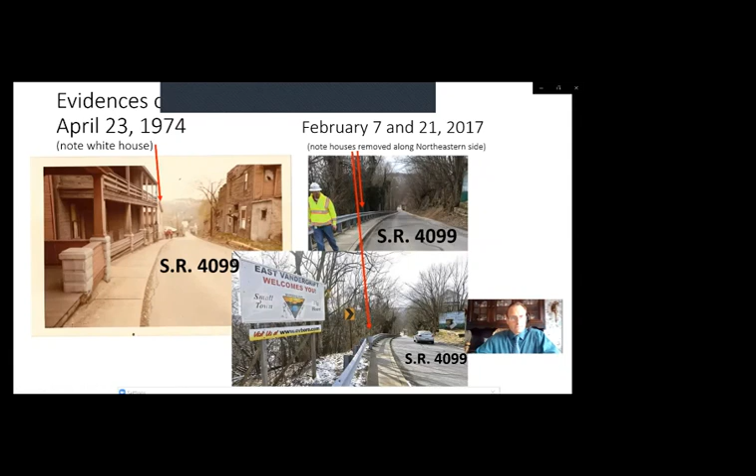Note this white house, because we'll be talking about it later in a couple of slides. Here's that white house. Frank Jones was the district geotechnical engineer at the time. He had the opportunity to go and visit with the people that owned the house and write a letter afterward explaining that it's not PennDOT's fault, it's the slopes around the road that are causing the problem.

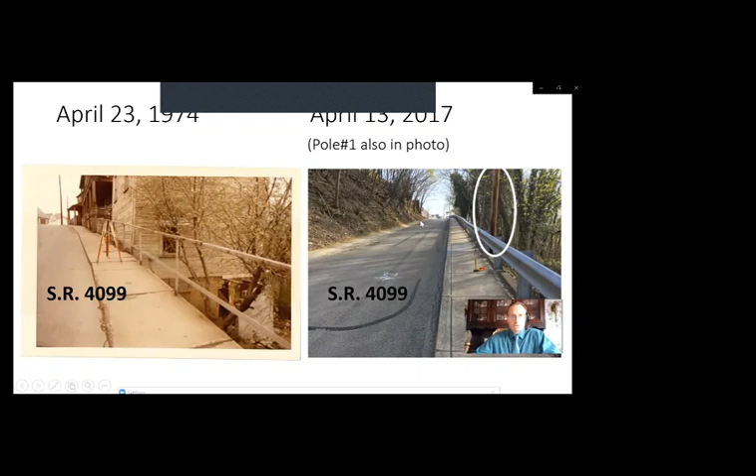Here's a picture from the outside of the white house, and the utility pole a little bit down further from where the white house would have been on the slope. This pole, when they put the sidewalk in, was actually formed into the sidewalk when they built it. Pole number one - as you can see, the slope has moved about 1.5 feet from when they put the sidewalk in. The pole has moved, and of course the pole moves with the slope.

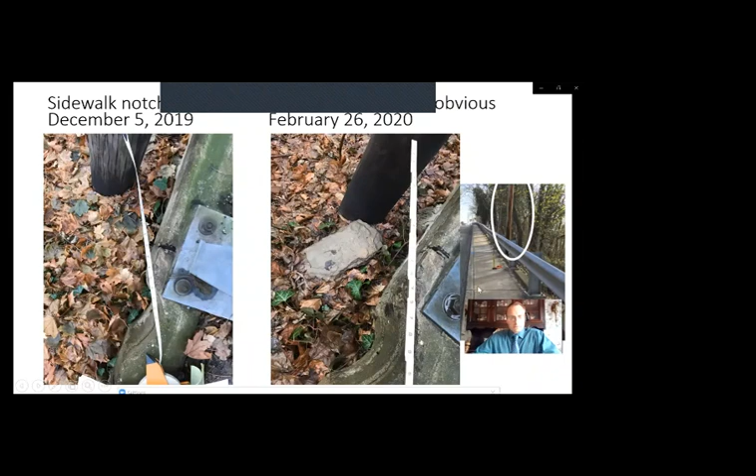There are 3 structures that were removed in the 14 years between December 2005 and 2019. They were all on the right-hand side, circled and pictured here. You can see there are GH holes painted on the roadway - those are grout holes, and we grouted under the roadway at that time because there were 5 to 8 foot voids discovered just underneath the brick of the roadway structure throughout this area in the northbound lane. So we grouted them up in 2005.

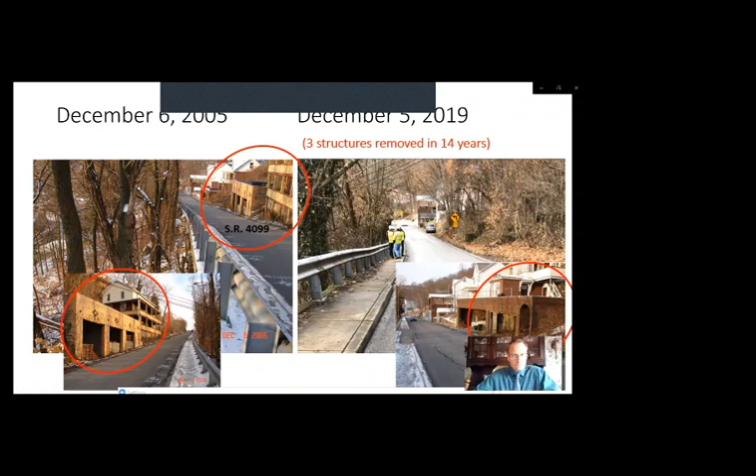This wall was bowing around the same time we put the inclinometer in, inclinometer F9. And in March, just before we determined this was an emergency, or around the same time, this wall collapsed.

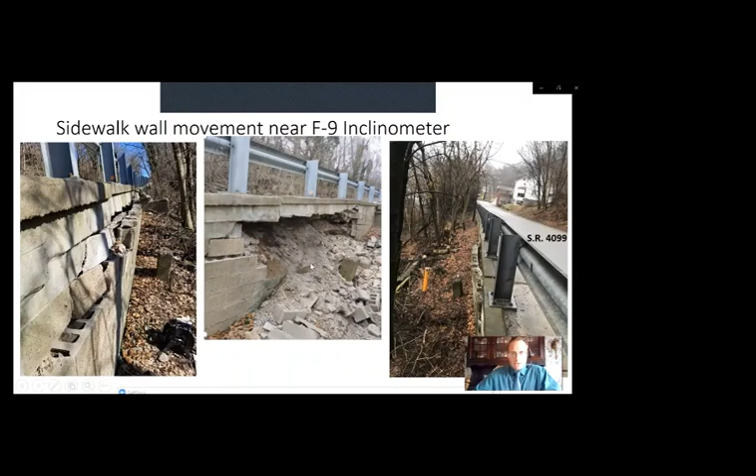A little bit more history here: in June 2017 we did a repair. We went down 8 feet, about 2 feet wide, like a bucket width, as far as we could go in the area that was having trouble where we saw sinkholes. We excavated it out and replaced it. Some areas, like in the foreground of this picture, had concrete that was already there, so we didn't remove it - it was hard to excavate that area, so we left it in place, probably from previous repairs they've done.

Similar to what we just did, that was only about a 40 foot long repair that we did there.

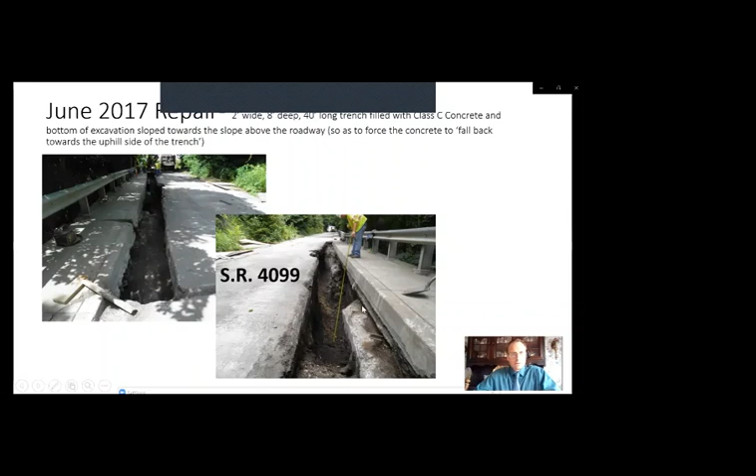Here's a series of photos from both Google Earth and Penn Pilot, historical photos showing the history of the disappearing structures along this stretch of roadway.

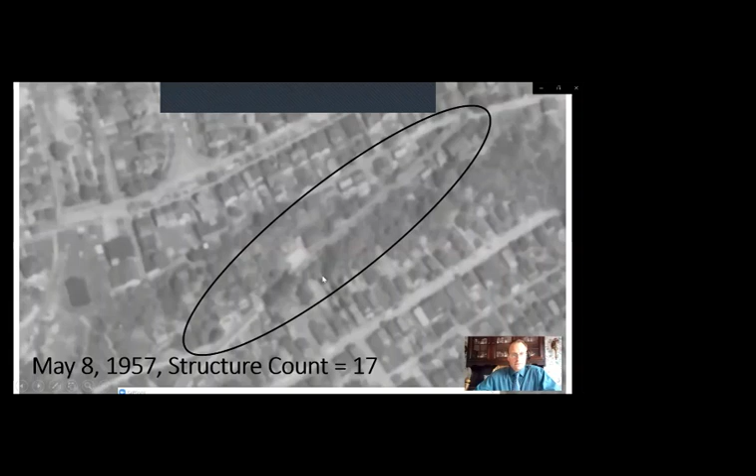Way back in 1957, I counted 17 structures. I think I got them all, I tried to count them all here. You can see both sides of the road had structures, and some of those we had pictures of early on in the presentation.

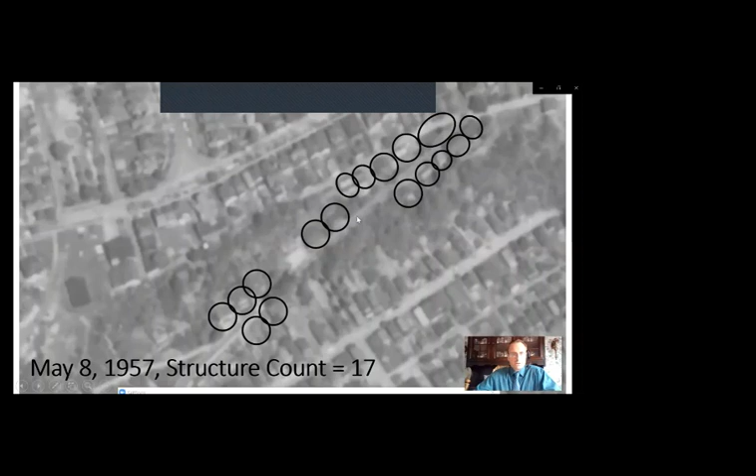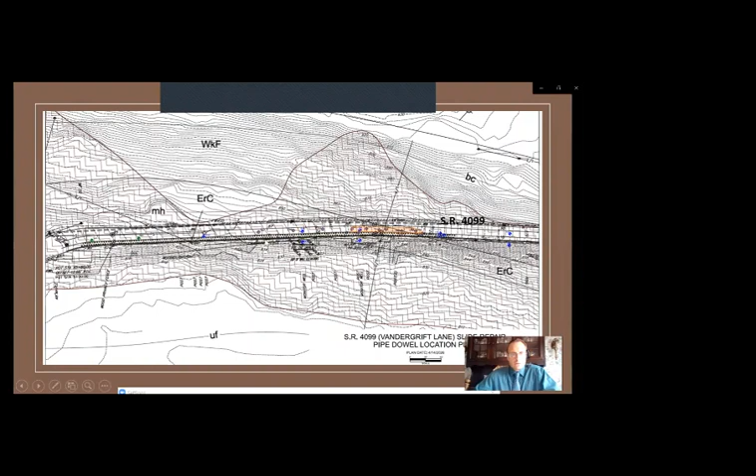Here they are, a little close-up shot. You can see that line comes right through at the edge of that porch, right near that front yard. And you'll see later we saw cracking just right there too while they were doing this construction.

These yellow dots represent the pipe dowels that they're installing for the slide repair. This just shows you about where the inclinometers are with relationship to everything.

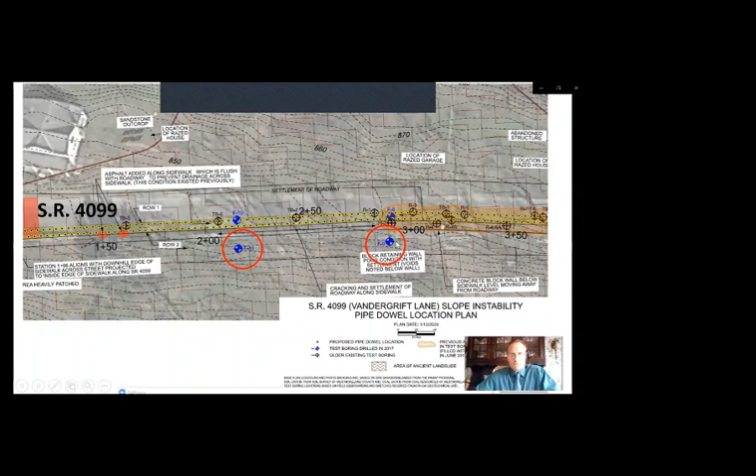So F9 is further away, F11 is closest to the house. And here's a picture of them in the field, off just over the slope here.

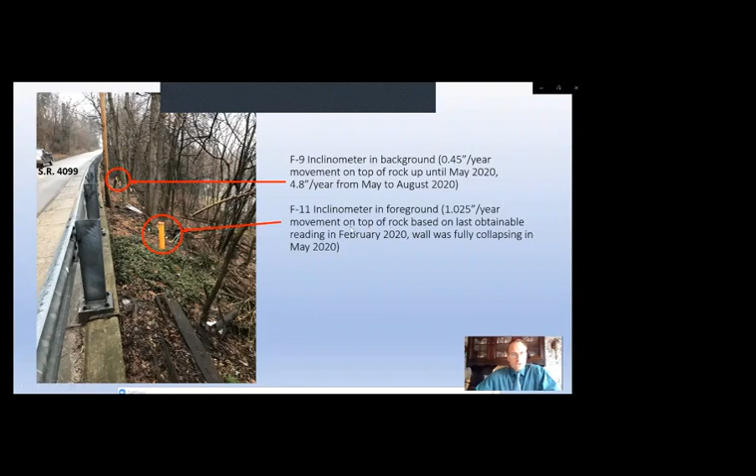F9 definitely showed an increase in movement, 10 times the increase in movement during construction than it did previous to construction. F11 was unreadable as of February 2020 because it had so much movement. I guess it pinched off or pulled apart. We couldn't read it anymore.

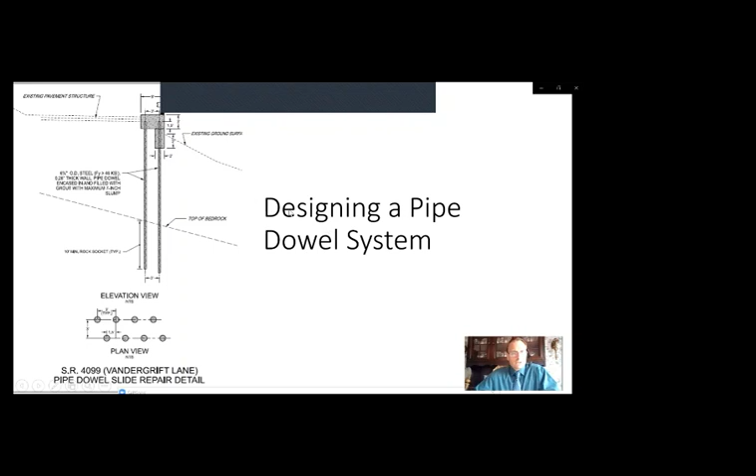Here's the conceptual design we're putting in for the repair: 2 rows of pipe dowels. You can see they're staggered, which activates soil arching to help stabilize the landslide. We're going to tie them together with concrete at the top, and we're going to detail basically what we did to come up with the design for the pipe dowel system.

So we drilled borings, and in the borings we put these inclinometers, and we got to see where the sliding was occurring. In this case, in F9, it was occurring in the weathered bedrock zone.

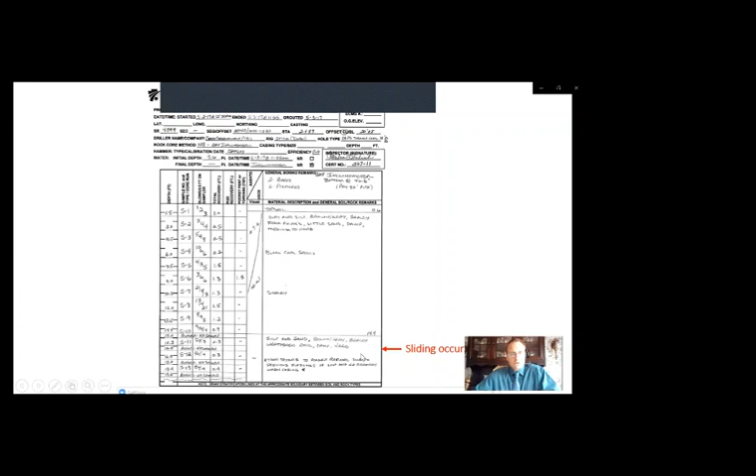Here's the readings. The axis AA is down over the slope direction, BB is with the traffic direction. You can tell that the movement before construction was pretty consistent, approximately 0.5 inches per year if you compute it out. And then once construction got going, it increased 10 times.

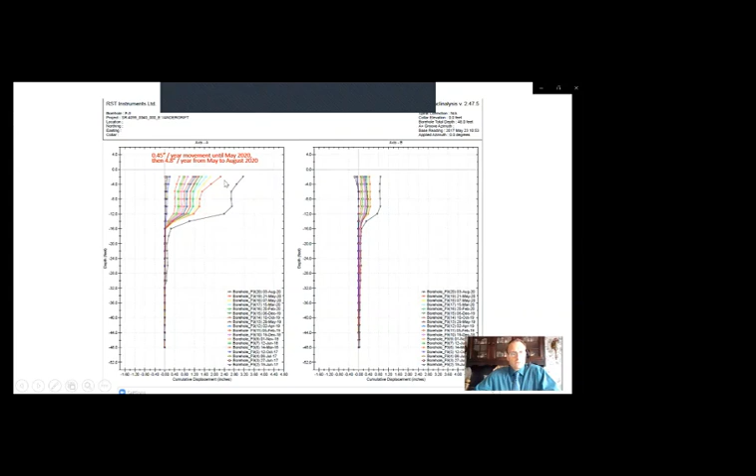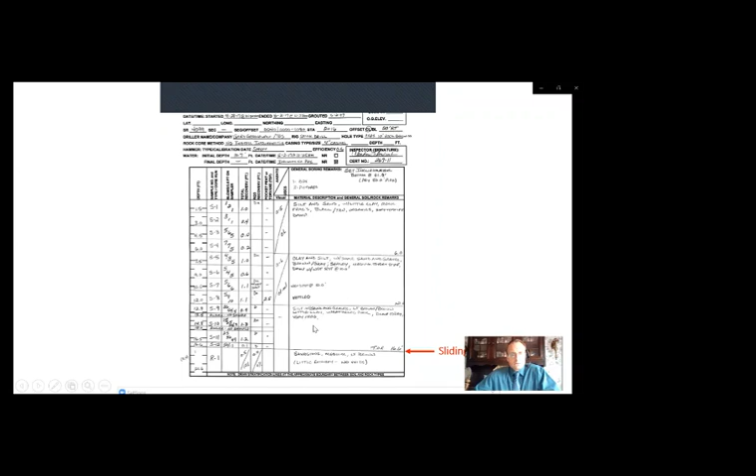F11 shows sliding right on bedrock beneath the weathered rock zone. It also shows the definite movement area. There's consistent movement here.

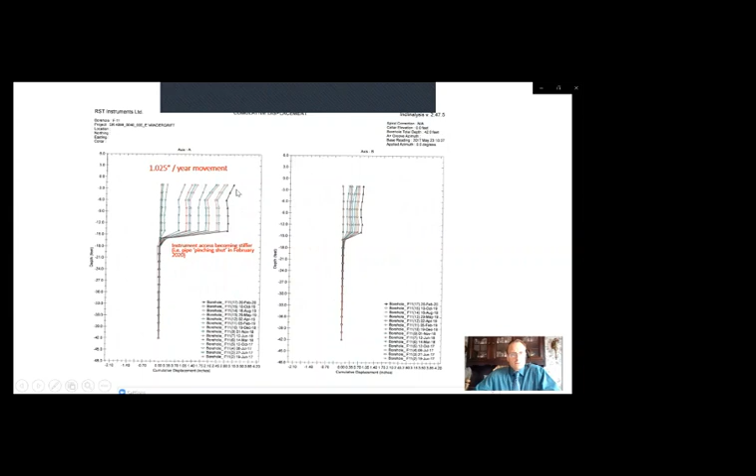We did some soil testing on those F series of borings too, and got laboratory test results back for those. We used as much as we could in our analysis.

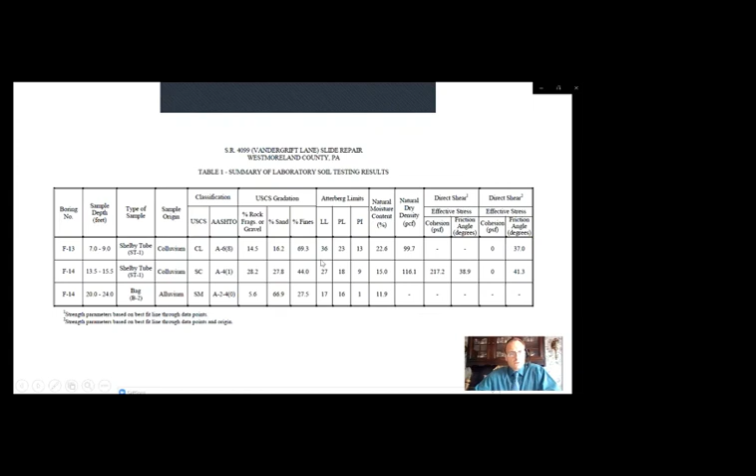We did back analysis also to help figure out our soil parameters and fit the failure surface right through where we saw the movement in the inclinometers. We adjusted the friction angles to make sure we got a factor of safety of 1, which means it's failing.

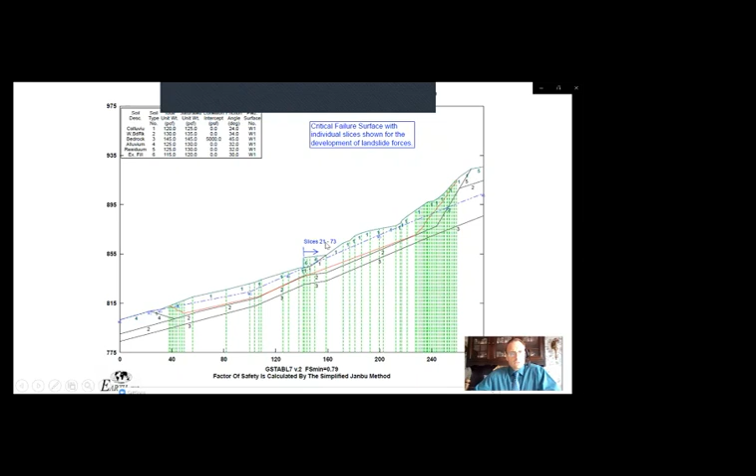Then we gathered the forces up at the point where we would put the pipe dowels. We'd use that to help develop what landslide forces we need to resist. Put the piles in and get a factor of safety of 1.86. Did the same thing at another section too. Same process: back calculate friction angles to get a factor of safety of 1. Get our forces, and then we get a good repair, 2.1 factor of safety.

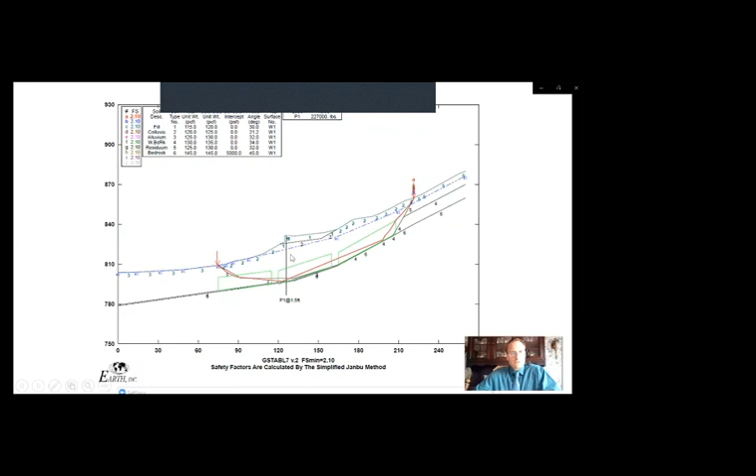We're going to check the deflections. At the top, the tops aren't connected, so we have large deflections, 20 inches of deflection for 1 POW. Moment of inertia is in the 30s, 37. Connect them up, 100 times more moment of inertia, and you get a lot less deflection, an acceptable deflection.

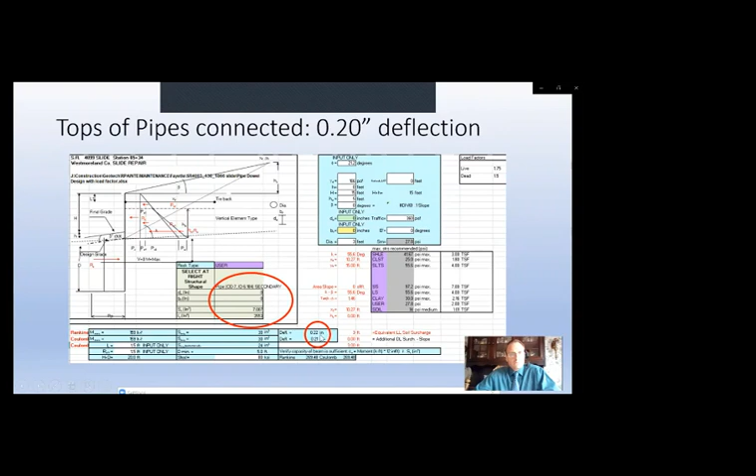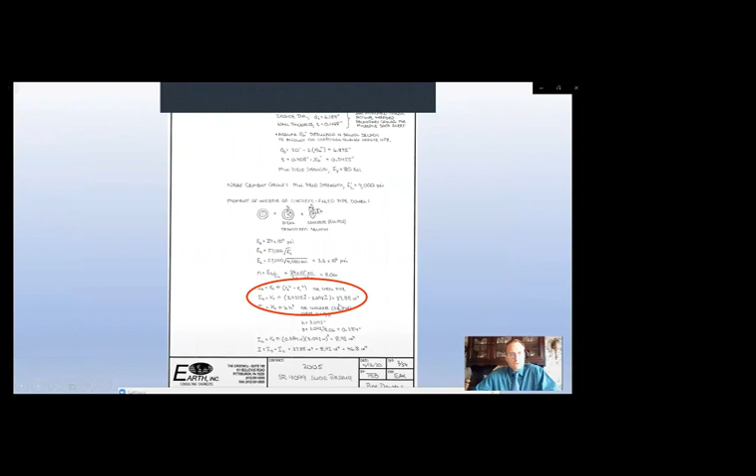Hand calculations for the moment of inertia in the 30s for 1 POW, and for group effect, 100 times more moment of inertia. Here's what the contractor's building right now.

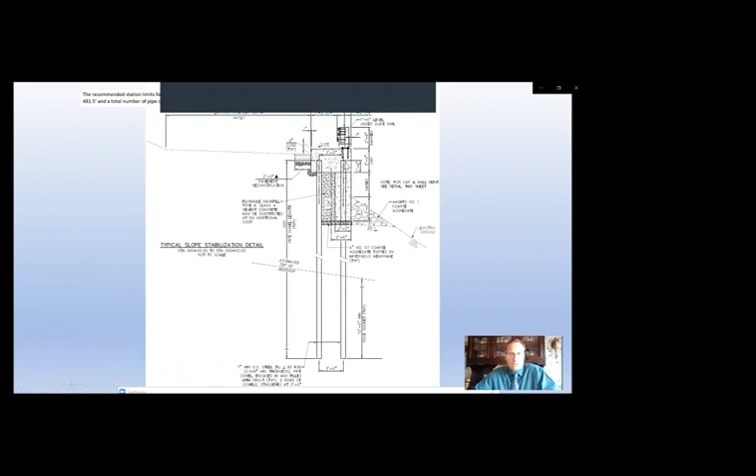80 KSI steel, 10 foot. We always socket these 10 foot into the bedrock, and we're tying it together at the top with that concrete of the sidewalk at the top. Here's some notes that the contractor's using in the construction to make sure that they get everything right. Grouting from the bottom up, vibrate them, make sure the concrete's going around them really well.

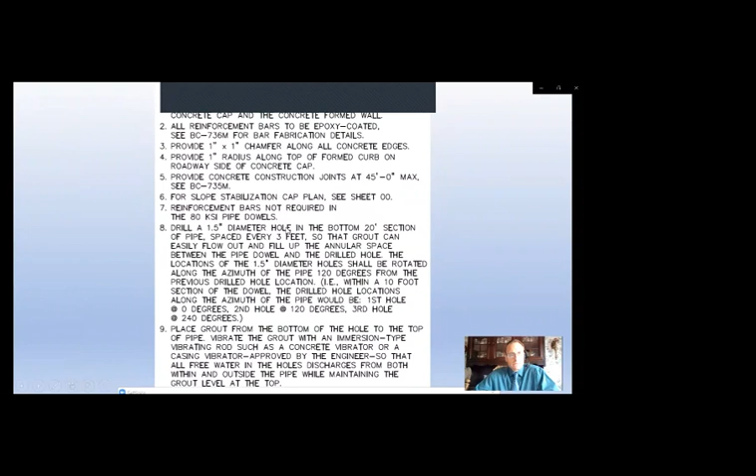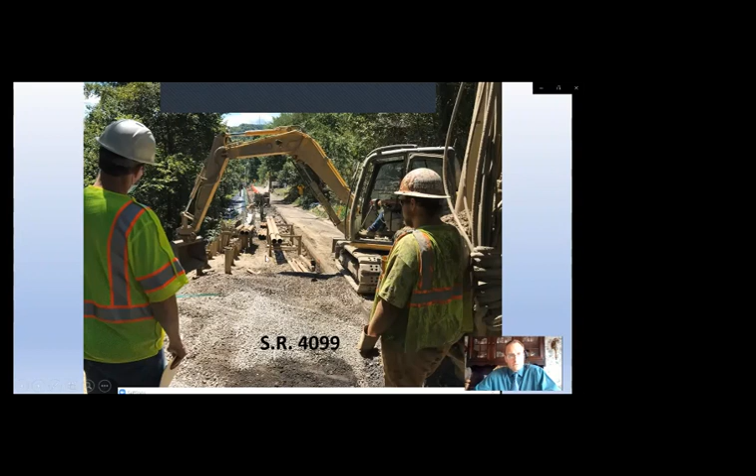Here's a picture looking south. Contractor's on the right, consultant that helped us design it is on the left. Here's another picture looking north. They're doing a good job. They're pretty much done with all the piles they need to put in. They just had a few more left up there.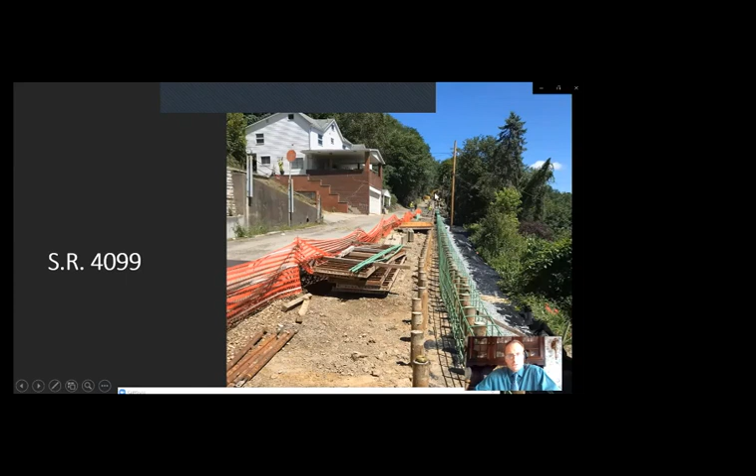Here's a picture of the last remaining house. The cracking's right through here. Here's a picture of the cracks.

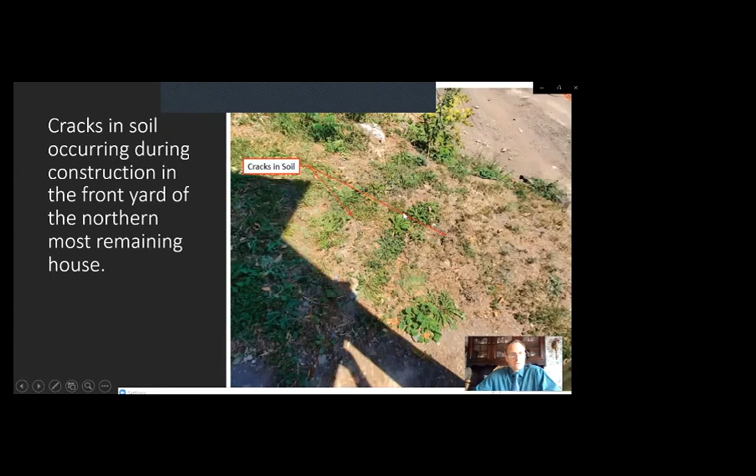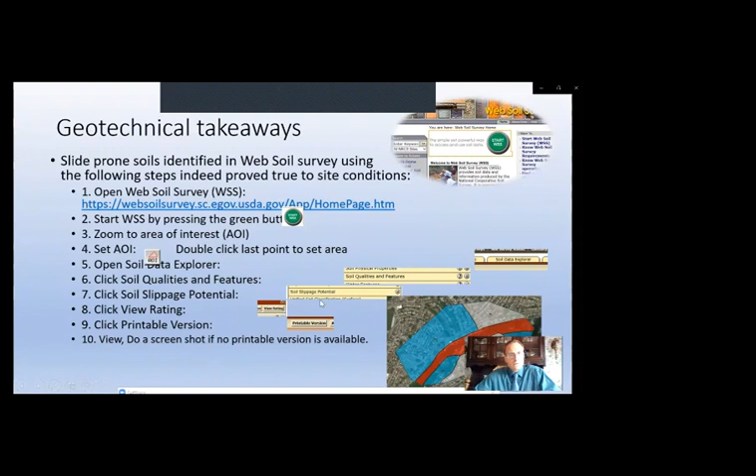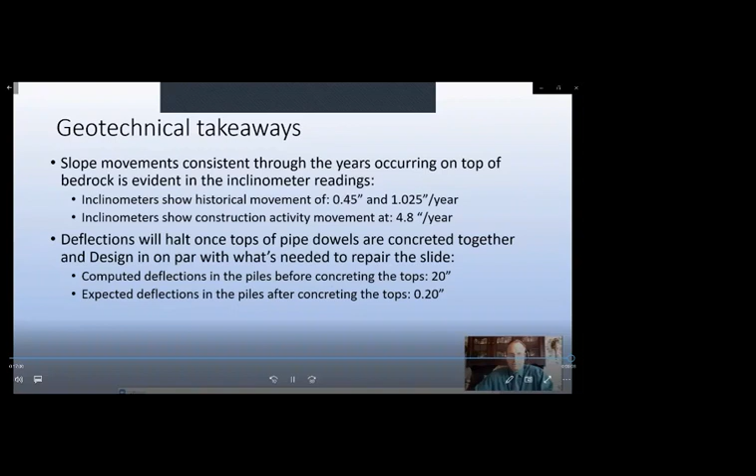All right, so that was Roy's presentation. I'm glad, even though he wasn't able to join us today, he was able to get it recorded and able to have us see it. So just one quick question maybe. And I know he's not on here, but I know Joe Shazer and Pat Brown, who are intimately familiar with the work, are on the call as well.

Could you please give a brief description on what an inclinometer is and how it functions, since a lot of us on here may not know that? This is Pat Brown. We can hear you, Pat. Yep, okay, yes, it's basically drilling a hole.

These were drilled down into rock, and then you insert inclinometer casing. It's roughly a 2-inch diameter casing or so. You grout that into the rock and the soil, and then you run an instrumentation down it. It has 4 grooves in it at 90-degree angles to each other. You run the instrumentation down it, and it reads in one direction, like going perpendicular to the slope, and then you turn it and read it the other direction, you get it parallel to the slope. So you install that, run the instrumentation down, and it gives you a baseline.